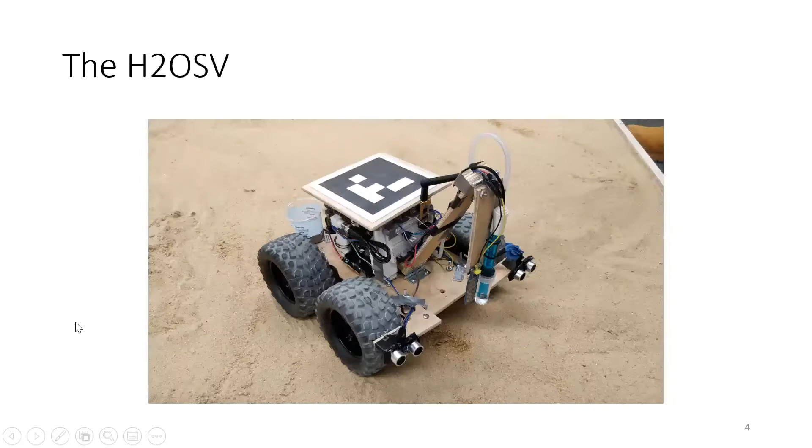So that was a hard challenge that we had to figure out. The way we worked around it is that we used absolute value. The code's a little bit confusing, but I'll try to walk you through it quickly.

The first thing we did was check if the location of the vehicle right now was greater than the destination y coordinate, or less than it. So basically we would be able to tell if our vehicle was above or below the destination, and based off of that, we would know whether we wanted to go downward or upward.

So let's say we were above the destination, that means we would want to turn down. But since we had a set amount of time, we wanted to turn in the most efficient fashion. So then we used what I was talking about earlier with the absolute value.

So if the absolute value of theta was greater than pi over 2, which means it was facing leftwards in some way, either up and left or down and left - meaning it was facing towards the second or third quadrant - then we would turn left, because that would be the fastest way to turn down. However, if it was less than pi over 2, then we would turn right.

And we did the exact same thing, but opposite, if the vehicle was beneath the final destination. I'll just finish up here.

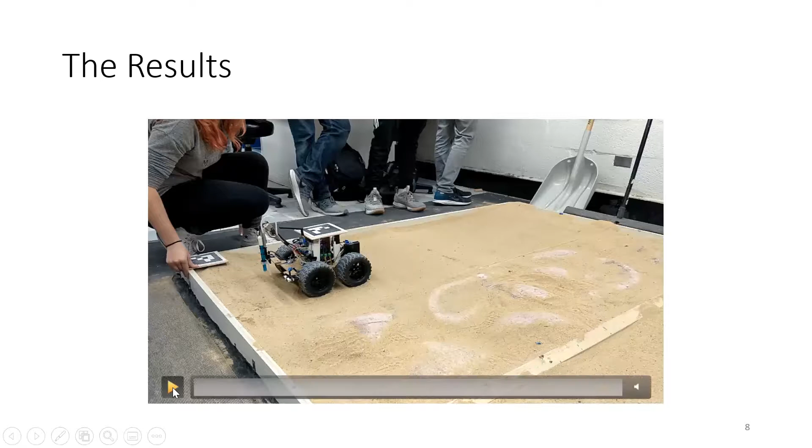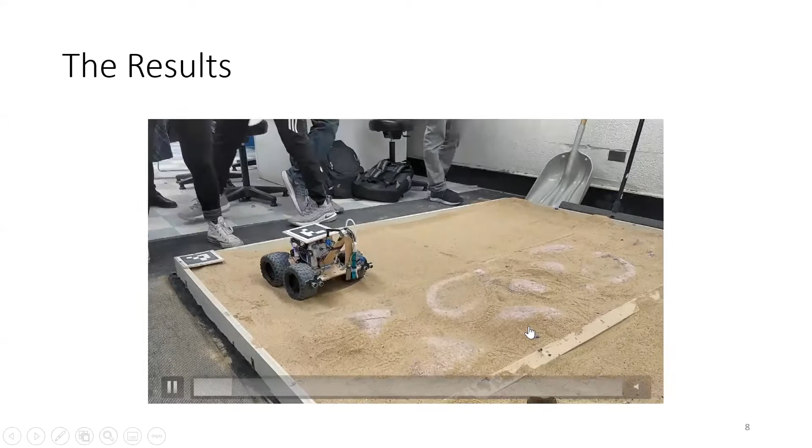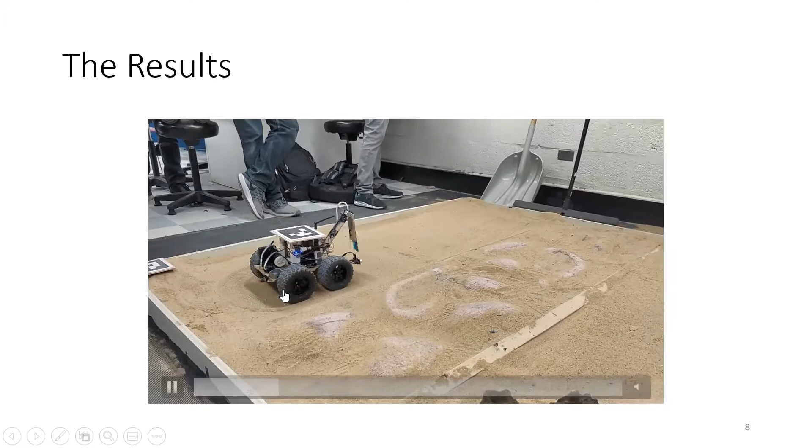Here you can see our vehicle. We right now determined that we were facing closer to this direction, but the destination is at a higher point than we are, so we basically want to turn to face upwards in the box. Now we've determined that we are facing upwards, we're going to continue going forwards. So here we go, we're going to keep going.

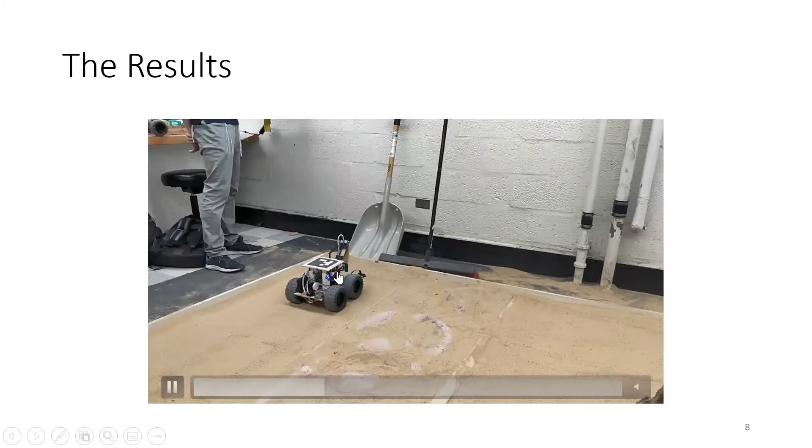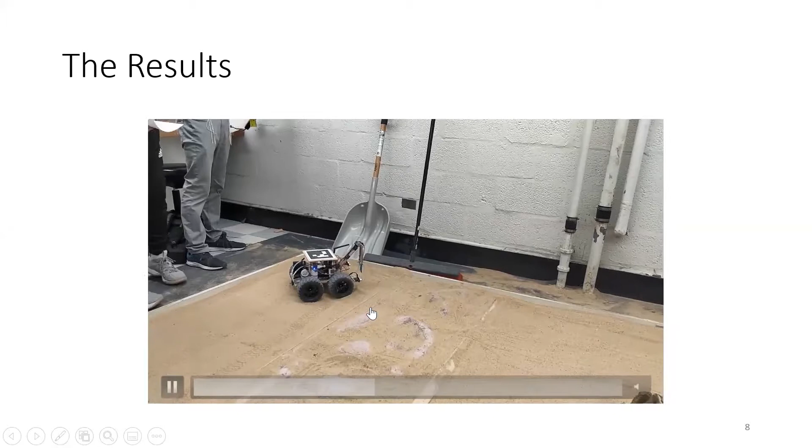The reason we decided to move in this lurchy fashion is because the vision camera system was not very quick. If we went continuously and fast, the camera wouldn't catch it, and we would go past our destination. Here you can see the whole course is covered in sand.

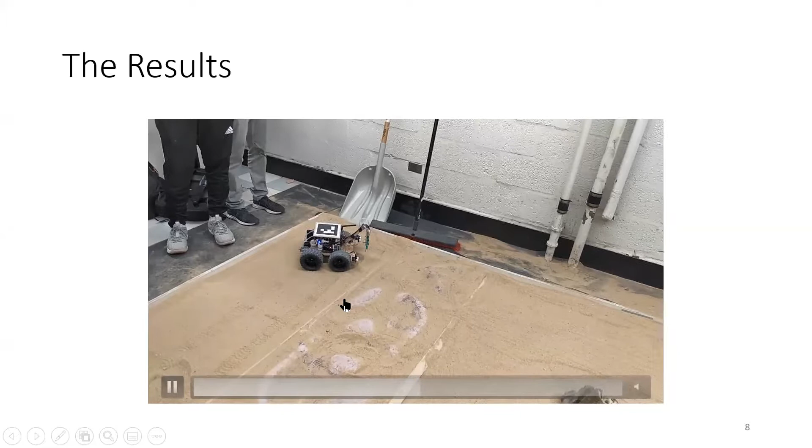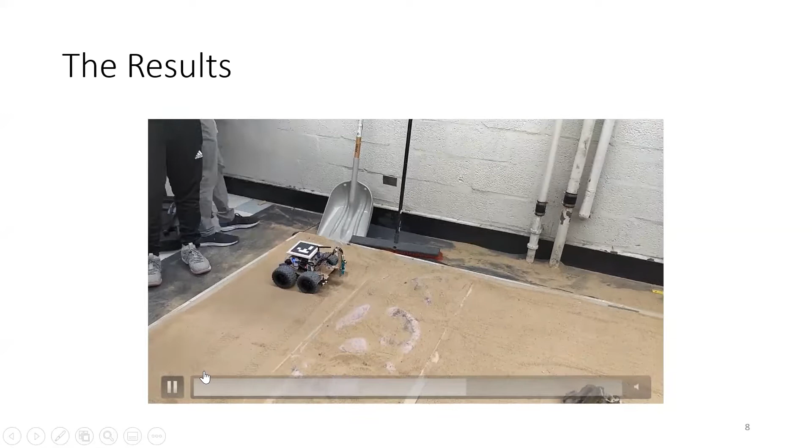So our mechanical engineers worked very hard on the calculations to figure out what kind of motors and what kind of wheels we needed, so we wouldn't get dug in or anything like that. See, we almost got dug in here, but our vehicle makes it all the way around, faces the right direction, and continues over this mountainous area.

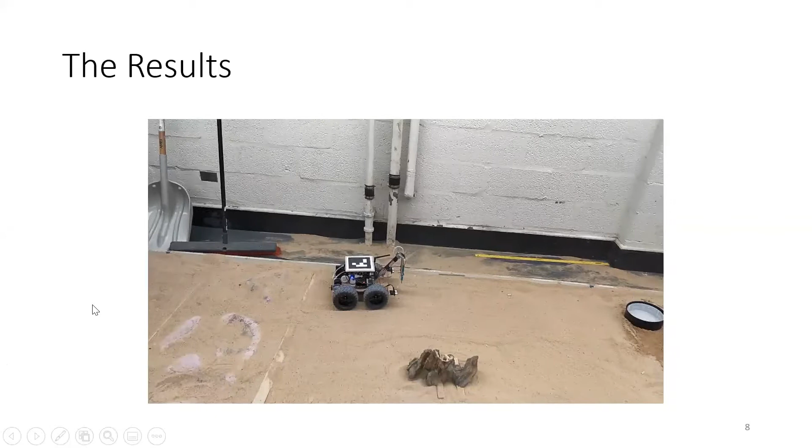And it's going to continue forward. Lurches a little bit off, but corrects itself. And here you see the mission site. We're going to make it in, and we're going to dip our arm right in.

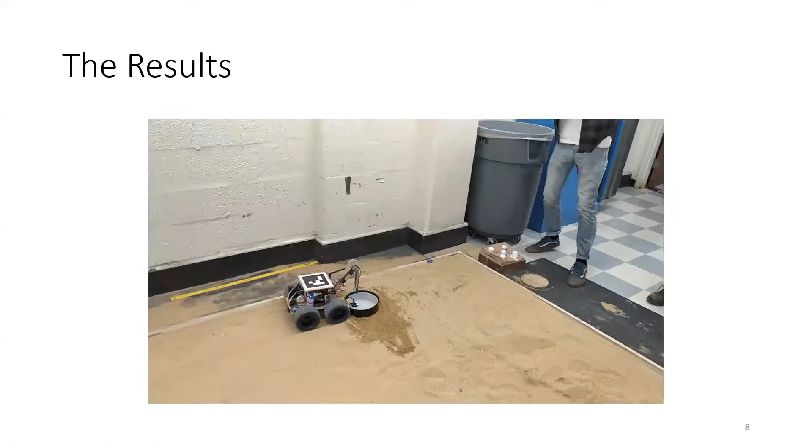Right now we are measuring this stuff with the sensors, and we're going to use this antenna right here to transmit the information back to the computer screen, which was guiding us the whole time.

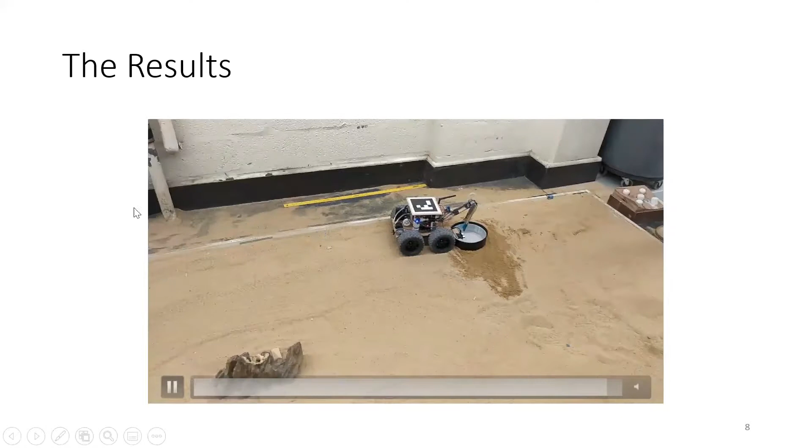So that is basically it. That's basically all from me. If anyone has any questions, I'd be happy to answer them, either about me or about my project. Thank you guys for listening.